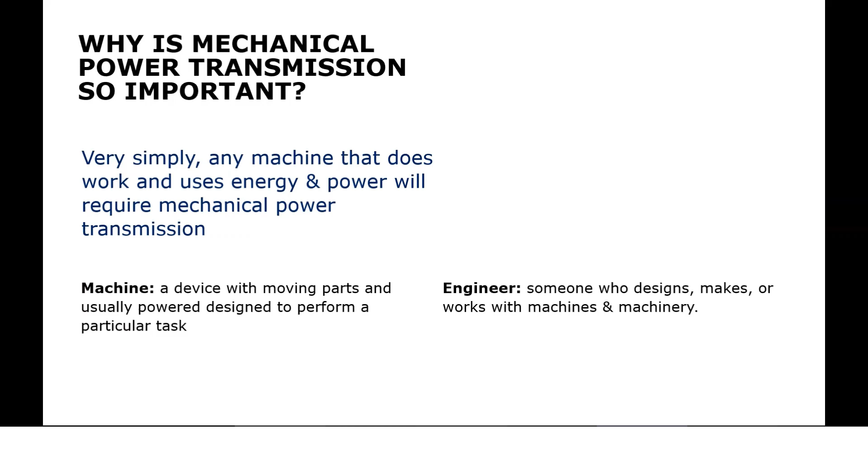So first of all, why is mechanical power transmission so important? These are just definitions - sorry, I'm jumping about a bit because I seem to be losing control now and again. Very simply, any machine that does work and uses energy and power will require mechanical power transmission. So every machine you will ever use will have some sort of mechanical power transmission. And an engineer is someone who designs, makes or works with machines or machinery. So that's really good news, because it says if you're an engineer, as long as man wants to use their machines, people are going to have a need for you. So we're going to explore that a bit.

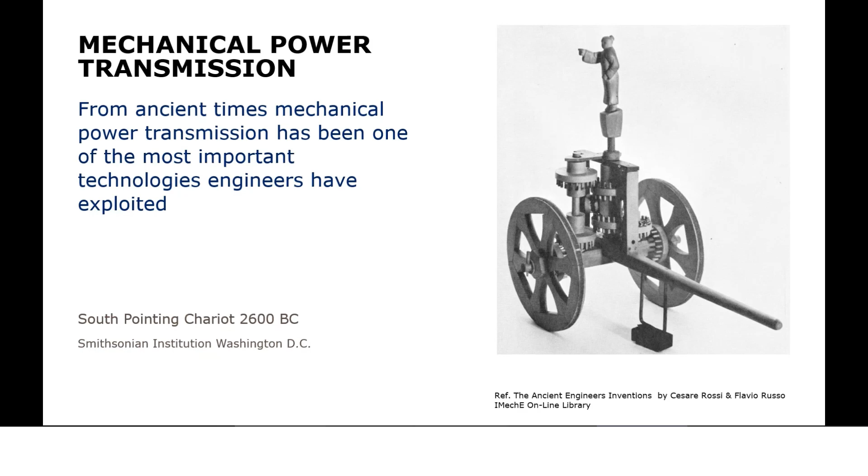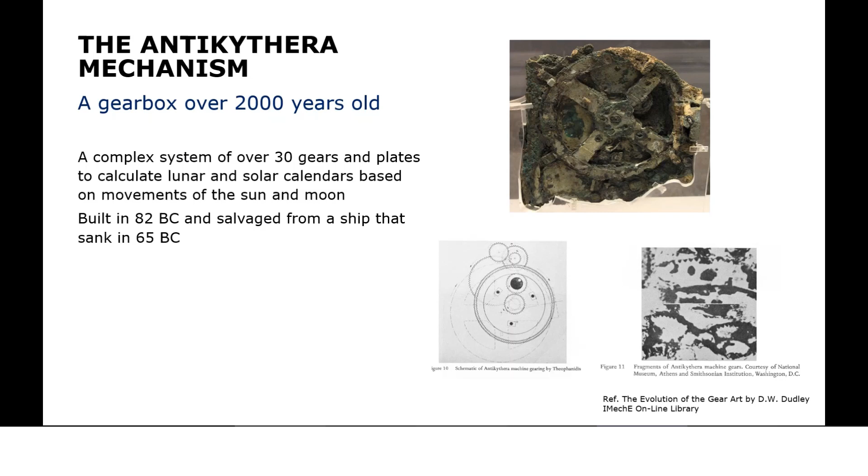If we move forward a little, this is only 2,000 years old, but this is a device to track the planets going around the solar system. So we could use it for navigation, and so we could look at the stars. And this is 2,000 years ago - people were using gears. And that's the point: all these machines and devices have been using gears and mechanical power transmission.

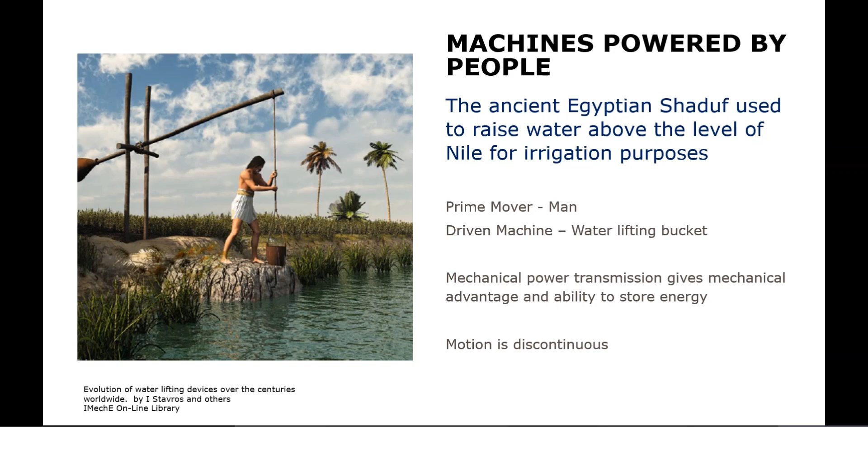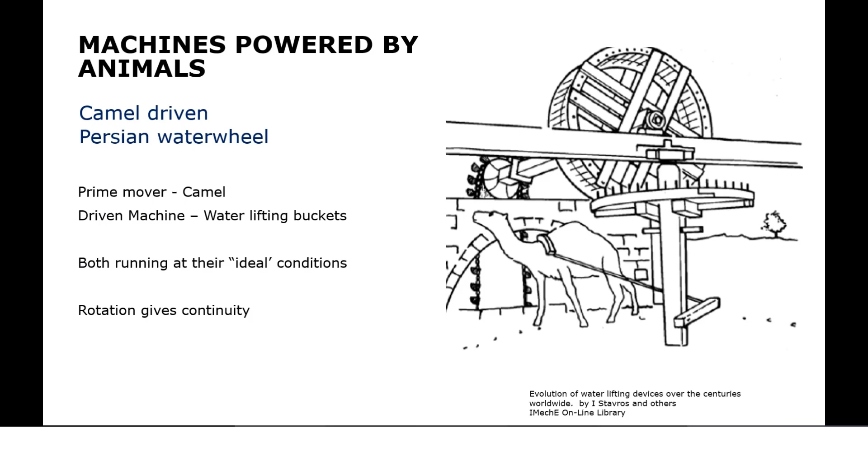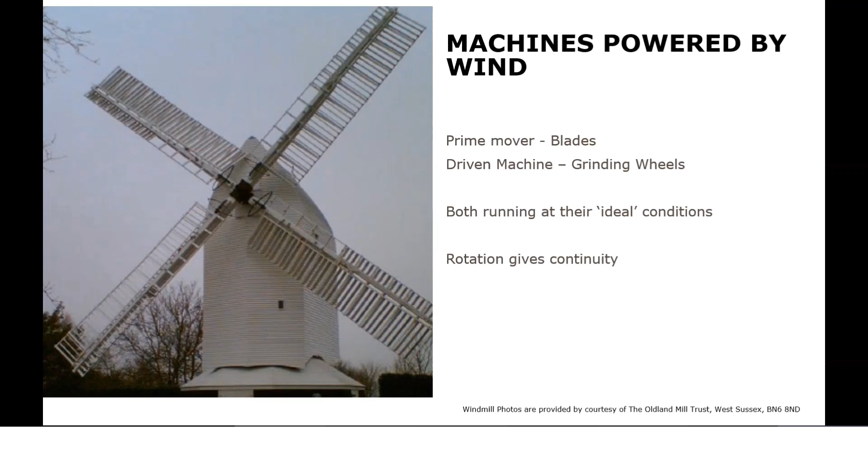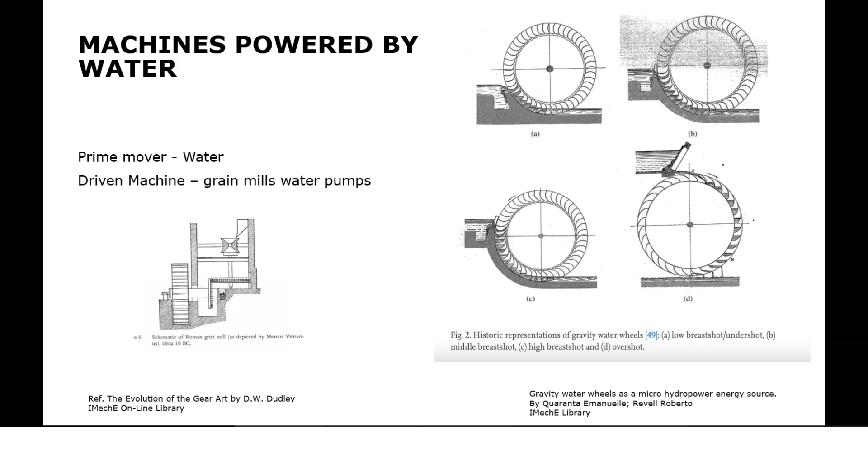But as we go through history, man really wasn't that satisfied, so he wanted to find engines which he could control. He didn't have to wait for the wind to blow, didn't have to wait for the water to run - he wanted a machine he could power himself. This is a very, very early engine. An engine is just a machine used to convert some sort of energy into mechanical energy, which can be used to perform useful work.

In this case, this is Hero's engine. It was never practically used to drive machines. But if you look at this diagram, what we've got at the top is a big sphere fed by two pipes, LMC and GFD, which are connected to a chamber of water. Beneath that chamber of water we light a fire, and all that fire is doing is converting that water to steam.

The steam goes up those pipes into that sphere, and you can see the two outlet nozzles allow that to spin around. So, if you like, it's a very early steam turbine. That was developed 200 years BC, over 2,000 years ago.

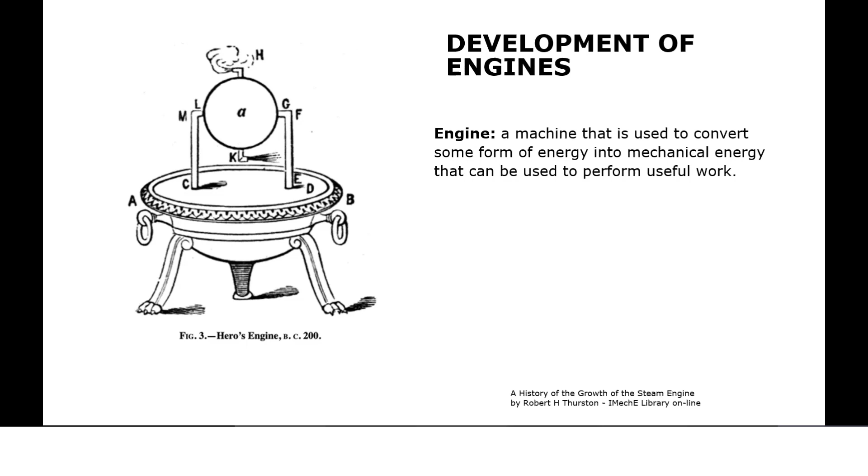Somebody's saying, well, I'm not going to rely on the wind and the rain. I'm going to be in control, and I'm going to use some sort of natural resources, whether it's wood to light the fire or whatever it is. I'm going to start harnessing energy and be in control. Now, that wasn't practical, and so we had to wait quite a while. Then we got the first practical industrial engine, and that actually required a new word.

So what I've got here is one of James Watt's steam engines, and you can see there we are using steam. I'm not going to go into the details of it, but what we have there is pistons. As you create the steam, you put it into a piston, it goes to and fro as it expands, and you get those pulleys to go up and down and start doing useful work. Those early ones were used for mines, where people were mining underground to get coal and tin, to go up and down to drain the mines from water so we could dig deeper to get the raw materials we wanted to use.

It's interesting. Until that time, we didn't have the word horsepower, but James Watt invented the word horsepower, and he needed it to prove, well, I've got the steam engine, I want to show people how powerful it is. So he invented the term horsepower to say, look, this is a 50 horsepower steam engine. It's got the power of 50 horses.

And there's a certain irony in that, because we sort of stopped using the word horsepower now. We use watt. It's certainly ironic that the man who invented the word horsepower, his word isn't used anymore. So we've started using a new word, watts and kilowatts, named after him.

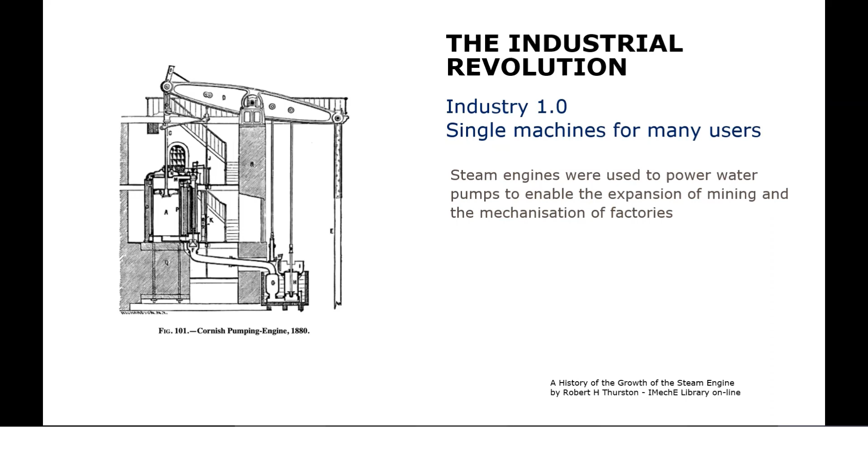We also had the mechanization of factories. So this is a cotton manufacturer in Great Britain. In this one, it may be difficult to see, but it's an old sketch of it. We'd have one big steam engine driving shafts going around. And you look at the ceiling above there, you have these shafts going along, and you can see pulleys and belts. Each of those pulleys and belts were connected to those spinning and weaving machines in this cotton factory. This was long before the days of health and safety legislation, and you had these belts spinning around, connecting all these machines.

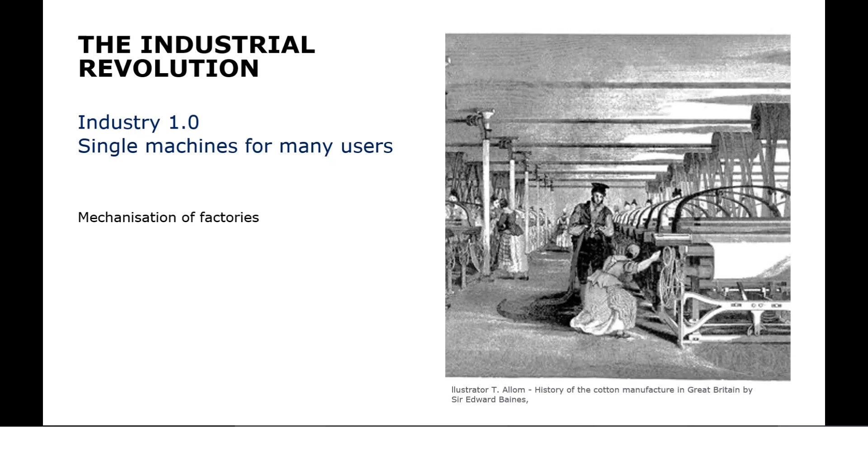So we could start having factories, mechanization of factories, producing cotton wool and all these other things. So one big machine with many users.

In addition to that, yes, we had factories, we had coal mines, we had mines producing all this output, and you had these cotton factories producing cloth and wool, whatever it was. So you had all these products and you had to do something with it, you had to distribute it. So we developed steam engines and transport systems in order to get the coal we'd mined, the cloth we'd manufactured, get it out to ports, get it out to ships and sell it all around the country. And this was happening all over the world. Once we'd started getting these machines, that happened.

Each of these machines has got mechanical power transmission in there, whether it's belts, pulleys, or even gears, it's used all the time. So that's Industry 1, the first industrial revolution.

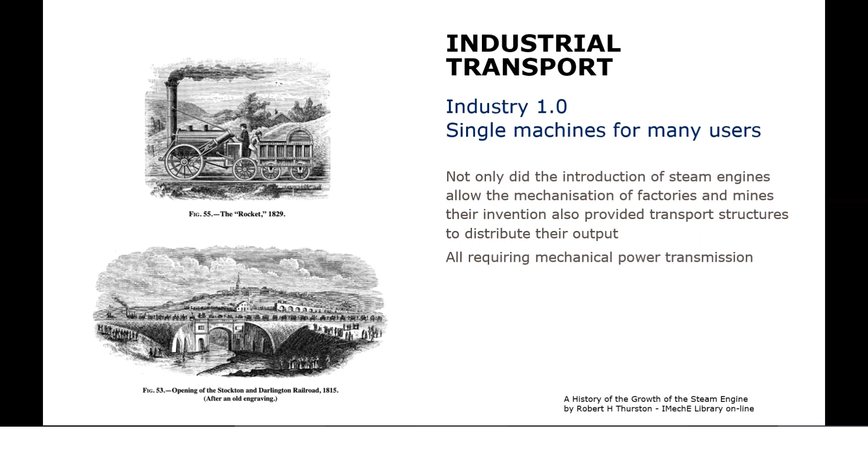But development was going on all the time. In addition to the big steam engines, you could also have small steam engines. If we look at this diagram, you can see we've got a very early electric motor, a picture of an internal combustion engine, and at the bottom right, a picture of the first steam turbine that was practically used.

Remember Hero's engine from 2000 years ago? Well, that was in the first ship to have a steam turbine, and that went at a speed nobody could believe. But what I want you to think about is that these prime movers were getting smaller and smaller, so you could have many machines for many users. You weren't relying on one big machine with lots of users, like at the coal mines or in the cotton factories.

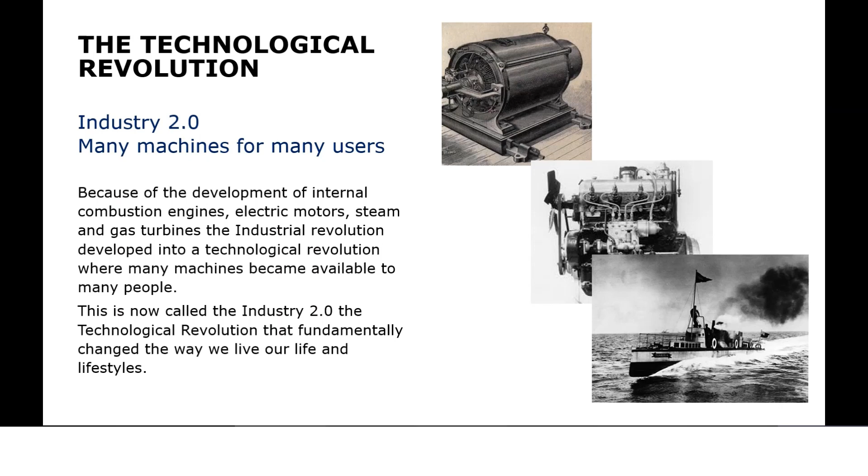And this pretty much heralded Industry 2, mass production. We take these things for granted. I just want to show you a picture of Henry Ford and the Model T car, from 1908.

Now, I know Henry Ford didn't invent the first practical car, and he didn't invent the first internal combustion engine, but he did two incredibly important things. He invented mass production. He said, I've got this car and I'm going to start mass producing them. And the mass production of cars did two things.

First of all, it reduced the cost of these cars, so they were more affordable. You weren't just making one, you were making hundreds at a time. It reduced the cost of production and made products more affordable.

The other thing, which isn't usually recognized, is that all of the workers in the factory got a step change in their wages. They got more money, and that meant they were in a better position to buy these products.

And it wasn't just cars. Remember the cotton factory. Once we started having mass production, the cost of products got cheaper, and the people employed there still didn't get massive wages, but they got regular wages, wages which meant they could afford them. This is the thing we take for granted.

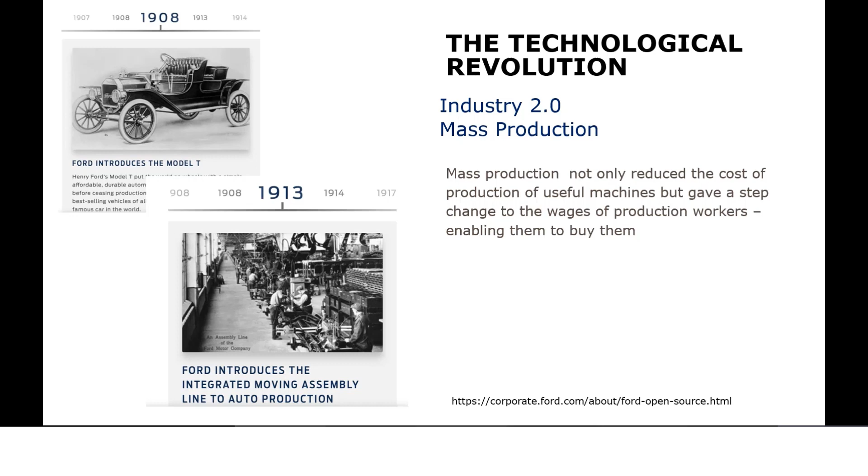So let's go through this again. What I said is that in all of these cases, mechanical power transmission allows the prime mover and the driven machine to run at their ideal conditions, whether it's a camel going round in circles or water buckets going up and down, or whether it's an internal combustion engine driving wheels - it lets them run at the right conditions.

Now I'm going to bring you an equation, the key to power transmission. I'm sure you're all engineers and know this already, but power equals torque times speed. And look, that name's come up again. So, a coherent set of units: watts equals Newton meters times radians per second. Power equals torque times speed.

That equation says that for a certain amount of power, whether it's coming from a camel, a man, or an internal combustion engine, if you reduce the speed, you increase the torque. You know that if you've ridden a bike or driven a car and changed gear - if you need more torque, if you have to go up a steep hill, you have to change gear, whether riding a bike or in a car, so you can have more torque, but you have to go slower.

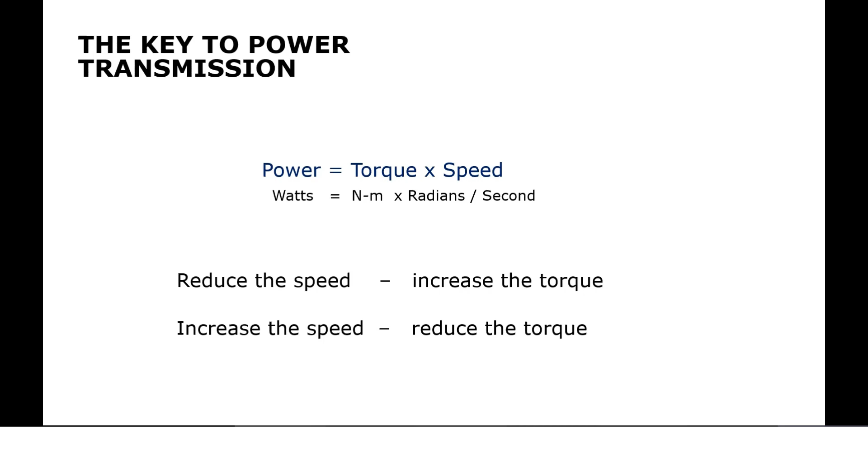And that's another thing we can do with mechanical power transmission: let me change the speed. Yeah, there are certain things that come with that. If you make things go too fast, you've got to think about centrifugal forces, bearings, and all those things. But basically, the faster it goes, the lighter, smaller, and cheaper you can make it. And you appreciate that, you can make things a lot more interesting. So it's doing all of these things.

But why gears? Well, let's have a look at this. And this is, again, for those of you who are members of the BGA, taken from one of our teaching packs. What I'm doing here is comparing different sorts of mechanical power transmission. I'm talking spur and helical gears, bevel gears, worm gears, but also remember belts, V-belts, tooth belts, roller chains, Morse chains, and friction drives.

All of those mechanical power transmission methods can do these things. Yes, they can change the speed. But let's have a look down the column. First of all, those are the normal ratios we can get from these devices, and the ratio is how much you can reduce or increase the speed. Then the next column down is the maximum power per mesh, in kilowatts.

So for spur and helical gears, we can actually transmit 30,000 kilowatts per mesh. That's 30 megawatts, massive amounts of power you can get through gears. Bevel gears can transmit almost 5,000. Worm gears we can run at speeds up to 10,000.

But just go down the column. Yes, belts can transmit a lot of power, but it reduces as you go down. Nothing really can compare with spur and helical gears for maximum power. And for maximum speed, 100,000 revolutions per minute for spur and helical gears. Bevel gears can go pretty quick as well.

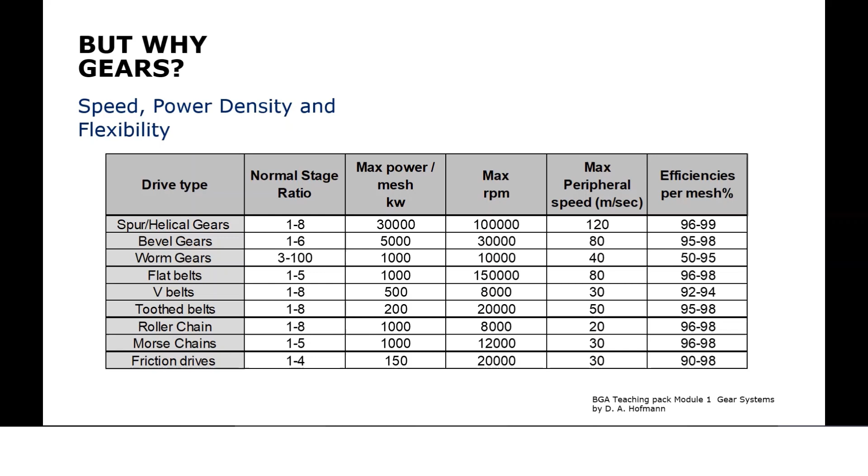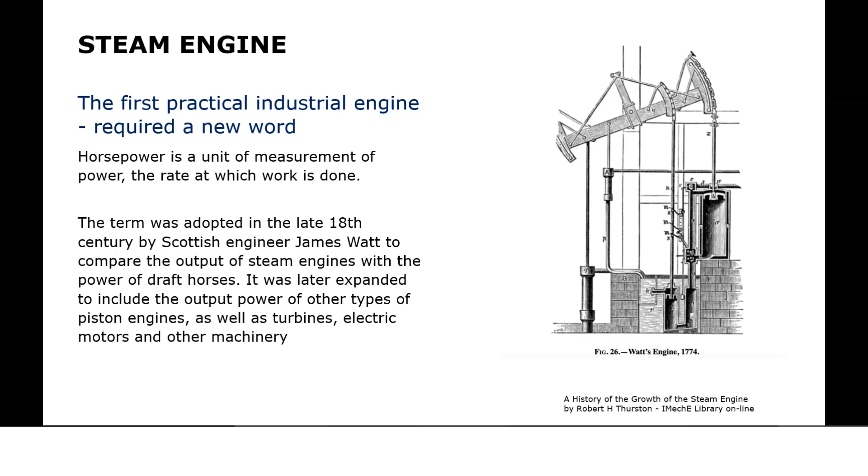So mechanical power transmission helps you, or lets you, run your prime mover and driven machine at their ideal conditions and ideal speed, and also make them lighter and cheaper. But if you use gears, you can put the prime movers and driven machines exactly where you want them. They don't have to be parallel - you can put them at 90 degrees or any other angle you want. That's why gears tend to be becoming so useful and important.

And remember, we've got all these devices with small prime movers, electric motors, internal combustion engines, and we can use this mechanical power transmission to develop lots of interesting machines. And I just want to explore that a bit. Let's just go back a bit.

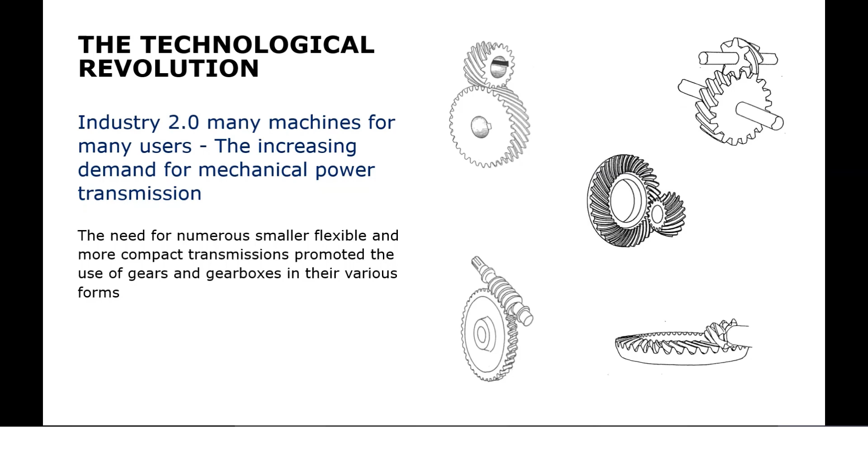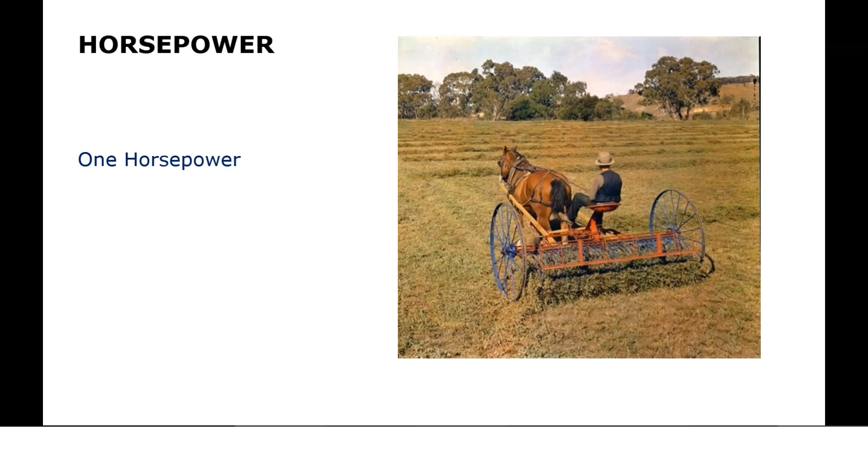Let's have a look at horsepower. Remember, James Watt invented horsepower, so he could show how powerful his steam engines were. Looking at this machine, which is just a farmer with a horse going around turning over grass to make into hay, that is clearly a 1 horsepower machine. Now, if you have a big farm, say in the USA, going back a little while, you may need a bigger machine.

So let's have a look at a 30 horsepower machine. I was quite staggered when I saw this. I actually didn't believe it, but this was the truth of it: a combine harvester going back, where you have about 30 horses. Now, I'm not convinced all those 30 horses are pulling their own weight, but if you want to harvest all of that wheat that's there, you need that sort of power to do it. Imagine you're a farmer - you've got to feed all those horses, make them all pull their own weight, put shoes on them.

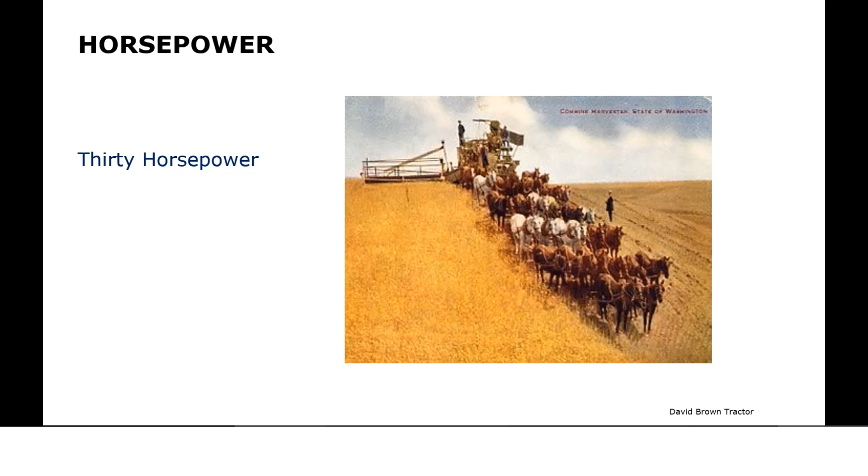It's quite awkward. But let's think what happens when you've got an internal combustion engine and a machine. There you have a 30 horsepower tractor. Because I used to work at David Brown, that's a David Brown tractor. It's quite an old David Brown tractor, but it's 30 horses. The truth is, that can do all of the work of those 30 horses. All I've got there is an internal combustion engine - within that quite old tractor, there's a 30 horsepower internal combustion engine.

What we have is a multi-ratio gearbox to allow the engine and the wheels to run at the right speeds if the man wants to go faster or slower, so we can change gear, change speed. In addition, he's got a bevel gear to put the axis of power through 90 degrees to drive those 2 big wheels at the back. He's also got a differential gearbox to allow the tractor to go around corners, letting the wheels go at different speeds and have the right amount of torque. Also, very cleverly, you can put in power takeoffs to drive lots of other machines. Just think about that massive step - internal combustion engine, gears and mechanical power transmission gives you the ability to do all of that work with one man on a tractor.

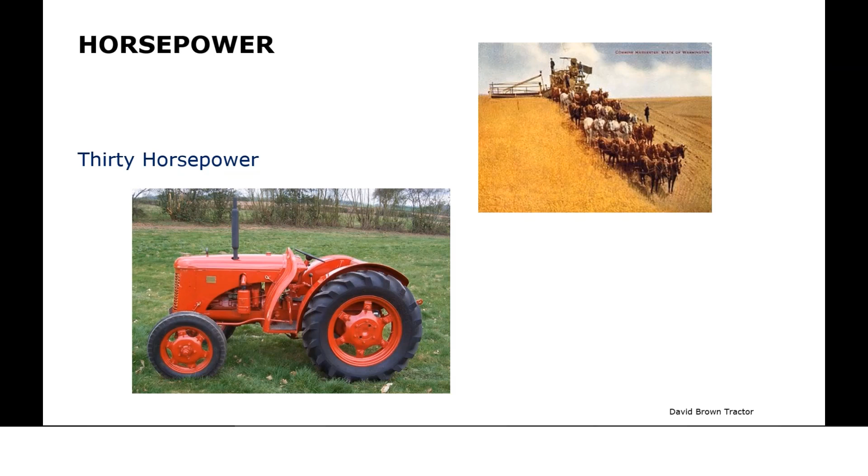Now, I'm not going to get involved in global warming and all those other things, but I'll give you a thought before I move on. At the beginning of the 20th century, the whole world had about 1 billion people, and at the end of the 20th century it had about 5 billion people. We were farming less land, or certainly no more, because 5 billion people take up a lot of land. So in order to feed all those people, you demanded to have large tractors and machines. Even though the tractors are probably a more efficient use of energy than the horses, because there's less wastage, you've still got to feed people. So that's a thought - we're not going to go there today, but it's just showing you how engineers are required to do it, and how we take for granted all those things happening at the moment, all those machines we have.

Everybody listening to this probably has access to their own modes of transport, whether it's a motorbike, a car, or a bus. We take it for granted, all those things that they get. I just want to go a little bit further into that, so let's look at personal transport.

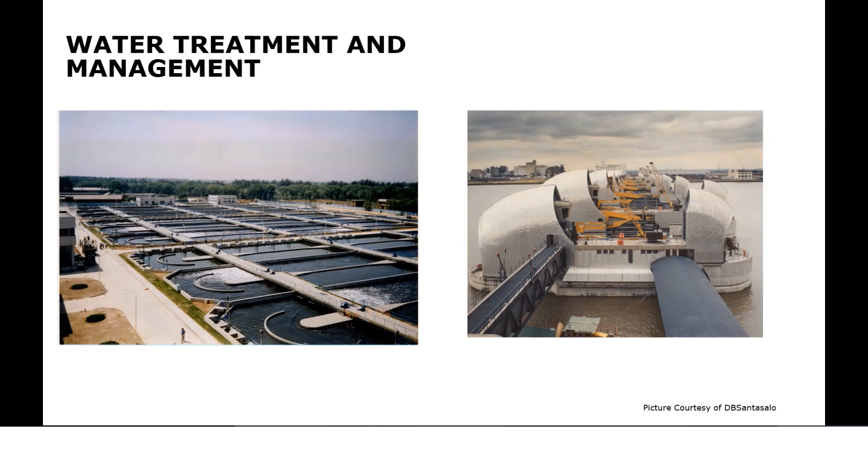Water treatment and management - that's a Thames barrier, if you want to make sure things don't flood, or you want to treat water, sewage management, you've got gears and gearboxes doing it. If you're making steel, if you've got steel mills - everywhere you go, machines do it.

So if we're going renewable energy - yes wind - over 90% of wind turbines have gearboxes in there. You can actually have wind turbines where you get the alternator to run at exactly the same speed as the rotors. These tend to be very heavy tower top masses, but I think it's no more than 10% of wind turbines don't have a gearbox.

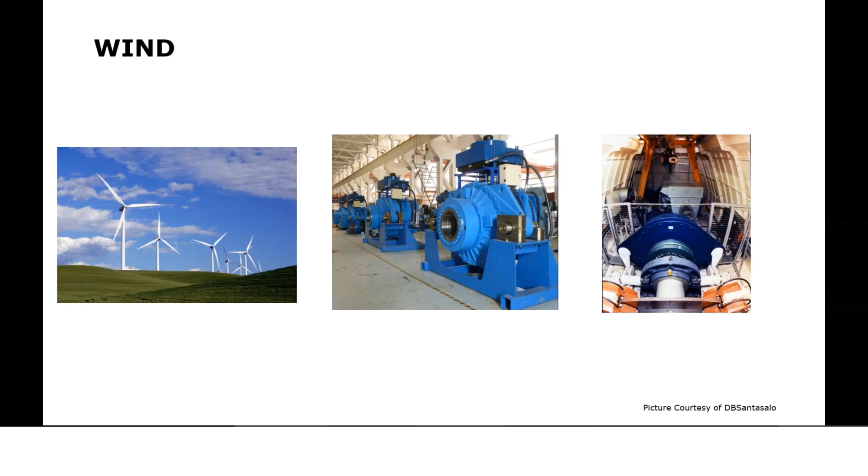Now in that application, each of those 6,000 mirrors had two sets of gears in there to tilt the mirror and rotate it to follow the sun. Not sure how much CO2 you used in making all those gears and gearboxes and how much you're going to save, but they're there to do it.

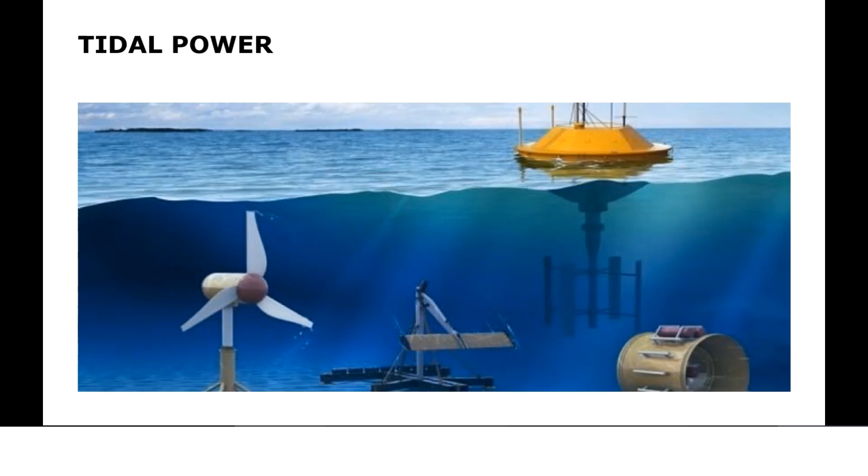So now then, I've come to these things. What I've shown you there is throughout history, we've used mechanical power transmission, gears and gearboxes, and very briefly shown you why that is the case.

But there's a terrible, inescapable truth, and it's quite sad for somebody like me to say, I spent my whole life being involved in gears, and the sad truth is nobody actually wants gears. They don't want them, they only have them because they need them. They need the gears and gearboxes and mechanical power transmission to allow the prime movers and driven machines to run at the ideal conditions. If by some magic prime movers could run at any speed or position, whatever you wanted, we wouldn't need gears, but at the moment we do.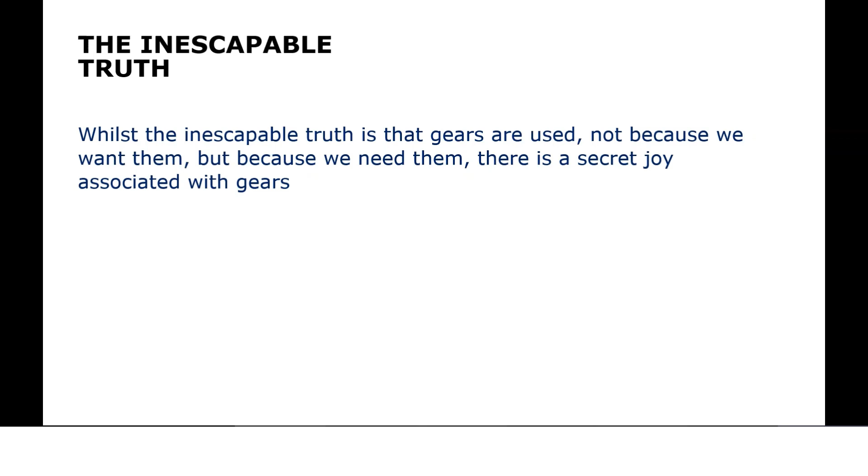But there is another secret joy. Everybody needs it, and you can make machines that much better. And this is the revelation, which I will read out exactly as it says: to fully understand and appreciate gears, one of the simplest, oldest, and perhaps most elegant and precise of all mechanical components, it is necessary to grasp a vast range of engineering topics. And that is the joy of gears. They embrace so many technologies that there's always an opportunity to learn something new. And it's inevitable that once involved with gears, you will meet and enjoy working with many different and helpful engineering experts. And that is the joy. If you're going to get involved in gears, you've got to start learning a lot of engineering things.

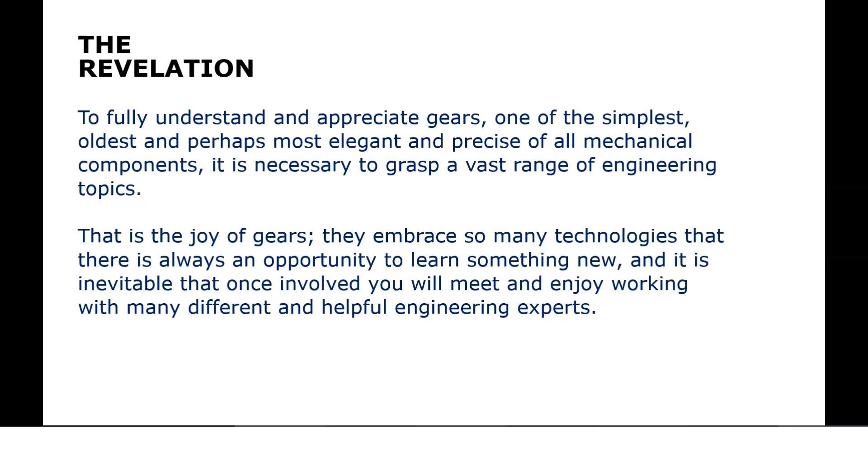So now I'm going to spend a little time just going through these things. First of all, we need to understand the machines we use. We need to understand the power-speed relationships. Two diagrams there, the one on the right is a fan curve. You look at that fan curve, the torque required by a fan goes up with the square of speed. So if you double the speed of a fan, you need 4 times as much torque.

And on the left there is a vehicle. If you're going to drive a vehicle, you need to understand how much power it wants. And there's two components there. First of all, there's a rolling resistance, which is the green line, and secondly, there's the aerodynamic drag, which is the blue line. You put them both together and you get the red line. You need to understand what that driven machine wants.

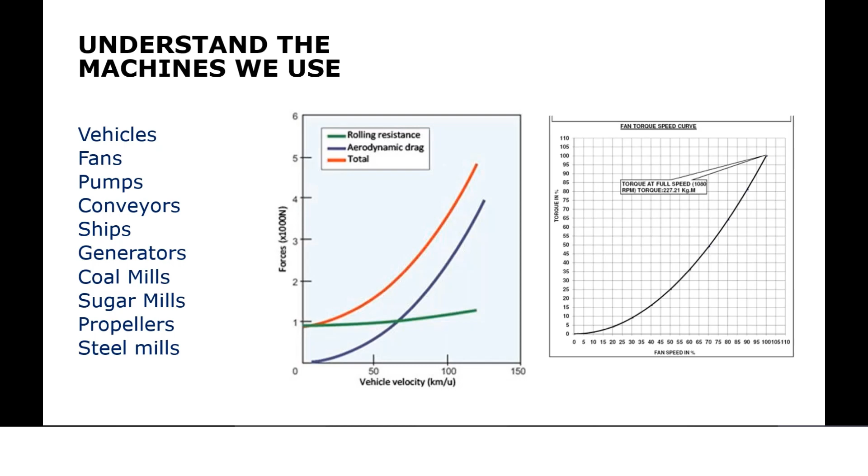Equally, you need to know the prime mover, how much power is coming from that. So just have a look at these graphs here. What I'm plotting there is, again, torque against speed. Top left is an internal combustion engine, top right is an electric motor, bottom right is a gas turbine.

So just have a look at that internal combustion engine, the top left one. You can see the torque, and you know this if you drive a car and change gear, the torque peaks and it tails away. So when you're driving an internal combustion engine car, either you or the automatic transmission will be continuously changing gears up and down, so you're always at the peak of that torque or getting the right efficiency.

Just go over to the right, where you can see the torque speed characteristics of an electric motor. There's two curves on there, the bottom is torque and the top one is the current required. Look at the one at the bottom of those curves on the top right diagram, you can see at 0 speed you get an awful lot of torque, and as you go up to speed, you get to synchronous speed, you don't get any torque.

Now, for years I've understood the mathematics of that, but until you actually sit and drive a car with an electric motor and electric drive, you're amazed how much torque you get at 0 speed. You put your foot on the accelerator, where else did that torque go? I don't have to change gear to move it. And it's quite staggering, but you do need to understand these things.

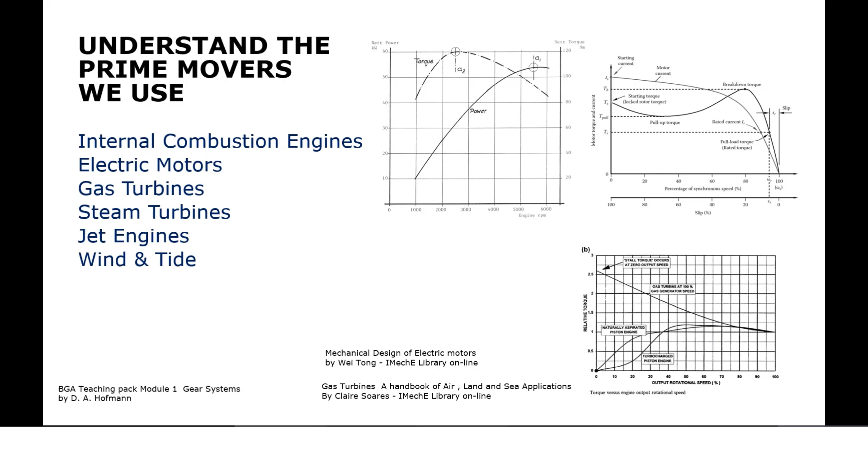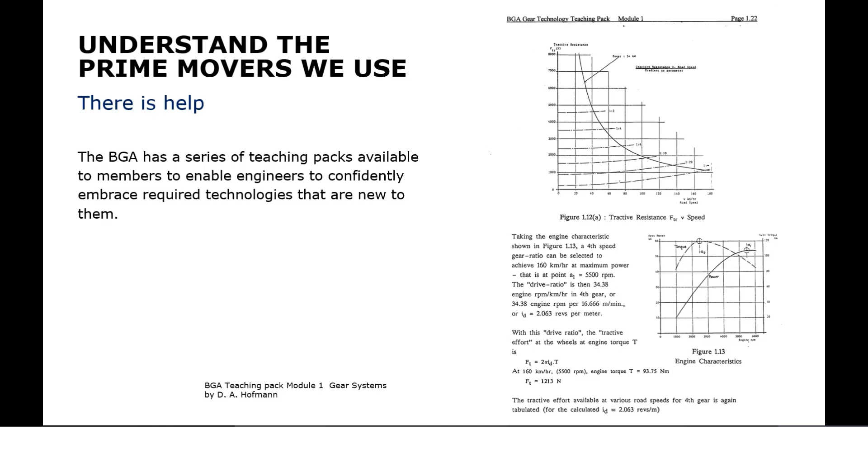So somebody has to put system designs together, so you do need to understand the system design. And what I'm going to show you here is a very simple way of looking at it, I'm going to use an electric motor, and that's my diagram at the top left there, where I can see torque against speed.

And I'm going to drive a fan. You go down, you can see that square curve underneath of the fan, and the diagram on the right shows me how I put those two things together. So what I've got there is the available torque from the electric motor, and then I've got the required torque from the fan.

And you can see they only come together at the rated load. At 0 speed, the fan isn't really demanding a lot of torque, but the electric motor is supplying an awful lot. So we have this overload capacity, which is great because it means I've got more power than I need, and very quickly I'll get the system up to speed.

And that's a great thing if you've got a light system with no inertia. It's like switching on a motor with a fan, it suddenly gets up to speed very quickly. But imagine in that system a very large inertia, and all that torque was there trying to get these great big inertias, great big bodies up to speed. You might take minutes getting up to speed, and all that time you've got more available torque than you needed, and you may be overloading the system.

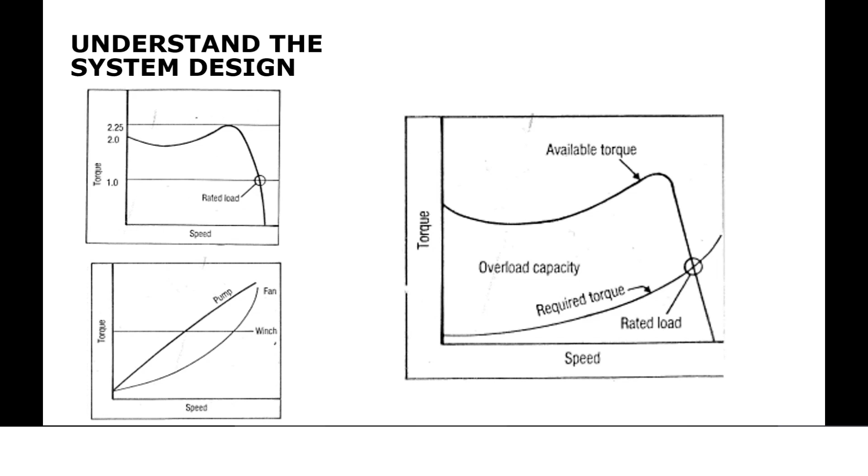So somebody with any system that's put together has to understand all these things and take responsibility. If you did have a system which had large inertias and you didn't want to spend too long getting up to speed, or if you were going to take time getting up to speed, you didn't really want to overload things, you could put a fluid coupling in there, you could put a torque limiting clutch in there, you could start getting a special motor which has a soft start. Those things have to be done, and somebody has to take responsibility. It's just another of the technologies you need to embrace if you're looking at mechanical power transmission systems.

So again, understand the loads in the system. The bottom right picture is actually showing you the load against time. That's, say, at the start of a shift, 100 horsepower, 100 kilowatt machine: you start at 80 kilowatts, you go up to 120, then after lunch you go down to 60, then up to 125. You think you're in control, but anybody who's measured loads, measured torques or powers, knows that even in steady state, look at the steady state picture there, nothing's constant.

And when you go from one stage to another, you get transient loads, things change. Nothing's ever constant. So what you may think is a nice smooth load, in practice may be nothing like that.

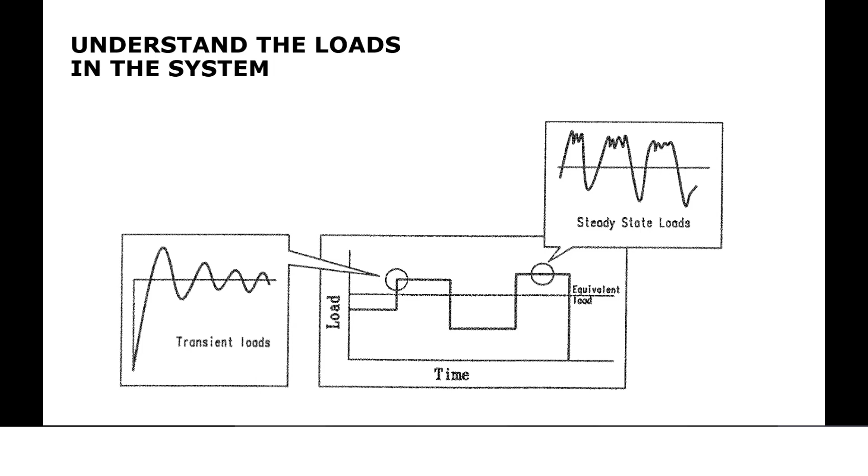And just let me give you an example. This is understanding the loads in the system. This is a bit of a history lesson, going back to when we had the first of the contemporary wind turbines, going back to the 1980s. And I know it's probably a long time before many people here were born, but in the 1980s, we were first starting to get the new generation of wind turbines.

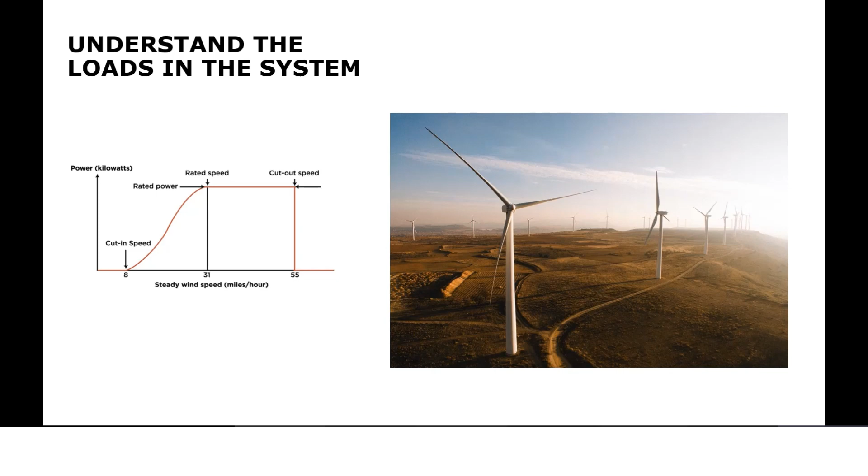Just let me go through this a bit. So when we started having failures, people started deciding they better understand the system. And so what we did—look at the wind turbine. Yes, you've all been to college, you can all write differential equations, we can all do an analysis of the system. So what do we do? Well, look at this diagram.

And then if you're really clever—and this is where my maths capability met its limit—trying to remember Laplace transforms to solve differential equations. But luckily I was working with people who understood these things, and we could start doing all of this to work out the loads in the system.

But the thing you soon found out is the most rigid part of that system is the air gap between the rotor and the national grid. In this case, it was the USA Altamont Pass in California, where it's 60 Hertz. I'll come back to that in a minute. Remember, you've got this series of lumped masses and stiffnesses, and I'm telling you now, the most rigid thing in there is an air gap between the rotor and the national grid.

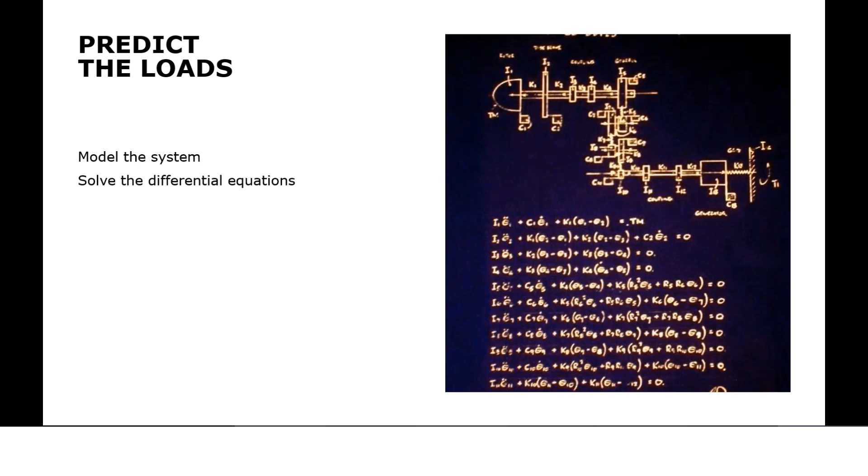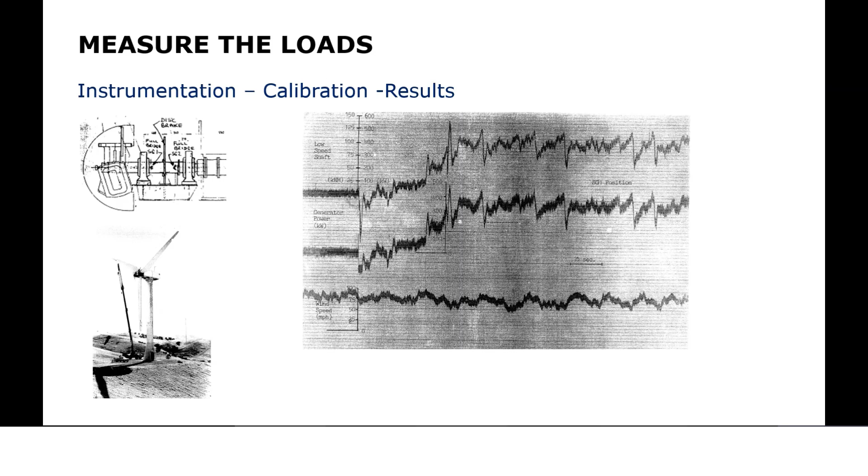And sometimes blades were falling off machines because of the loads that were being transmitted. And we learned from it. The truth is, when you learn from this, we start developing application factors, and those are critical when you're designing gears. Lots of the courses we run at the BGA cover this, where you have to understand for a particular application what sort of overloads you would expect. So we have standards, international ISO standards, national standards will give you advice on application factors, industry standards, the wind turbine industry has its own standards, the petroleum industry has its own standards. You need to dig deep and understand what's going on in the system, because it's unlikely you're ever going to have the time or even the capability to do those differential equations. And clearly you can't measure loads till you've actually built the system. So as engineers, you're going to have to start relying on application factors and lessons from history.

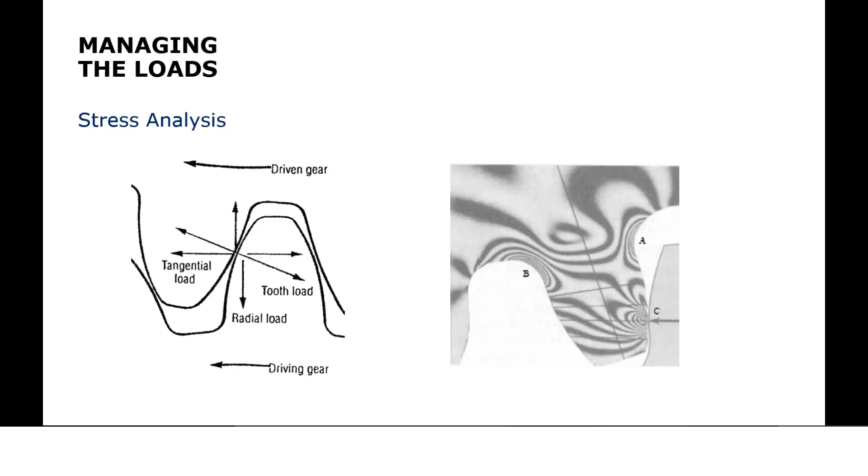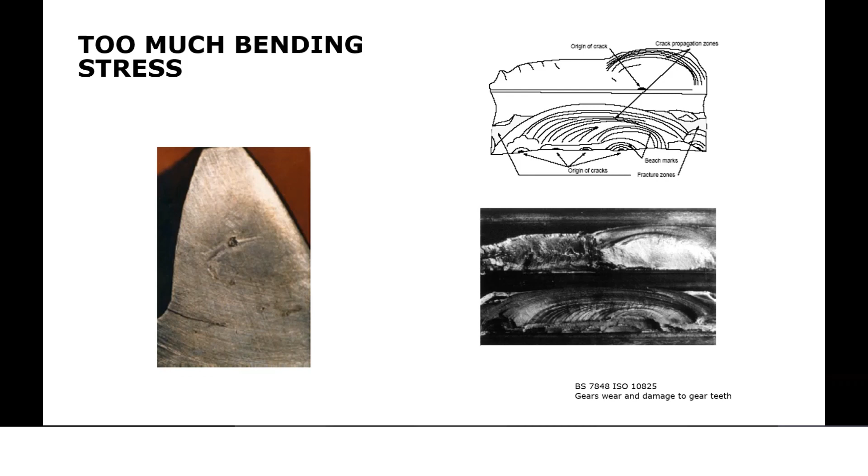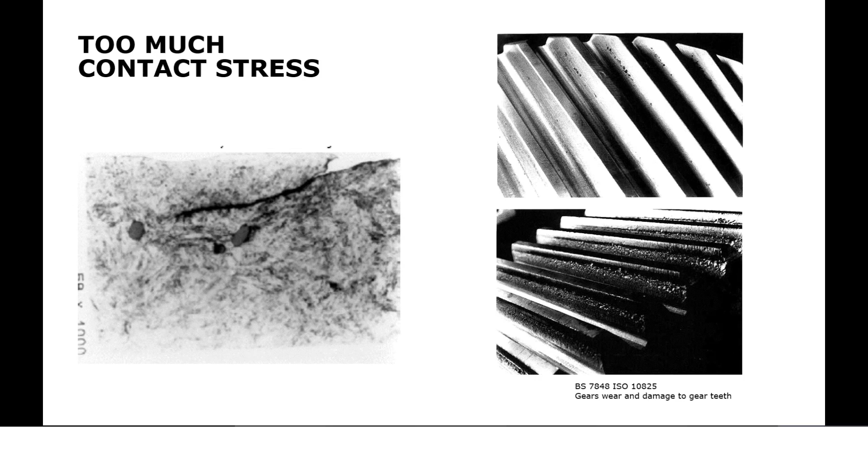So yeah, we can calculate the loads, find them out, but then we have to manage them. We won't go into too much detail here, but if you're going to design gears, everything you learned about stress analysis you need to understand, because those gear teeth are going to start suffering from contact stresses, bending stresses, and you've got to make sure there's no wear failures, because the surfaces will be sliding and rolling together, and you need to make sure there's no damage to the surfaces. Too much bending stress, you start getting cracks. So everything you learned about endurance limits, strength of materials, Goodman diagrams, you will need to understand gear failure. And you need to understand about Hertzian stresses, contact stresses, and all those technologies you need to learn about and embrace.

But it's not that difficult, because there's lots of standards about. In fact, the good news is there's lots of standards which cover all of the engineering topics. Perhaps the bad news is these are not straightforward. There's a lot of involvement in understanding these standards, but the methods are written down and you will have to dig deep into them. Another great advantage of the BGA, the British Gear Association, is all members have access to the top 25 gear standards.

So if you want to look at the top ISO, BSI standards, you can go to them online. Typically, if you had to buy all of those standards, it would cost you £6,500, but you can go online. You can't download them, but you can read them all and follow the equations. You don't have any discretion these days. You have to follow international standards if you want approval for the things you're making and designing.

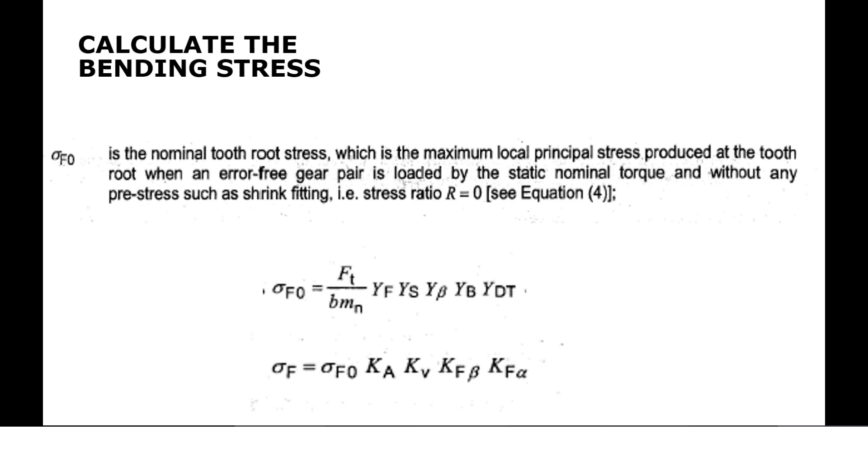And the allowable bending stress, again, we work at endurance limits. And the truth is, it's fatigue. Very quickly with gears and gearboxes, you get up to infinite life. You soon get 1 million cycles of load. So you need to start doing testing of the materials, finding out all about it. And again, one of the many standards goes through in much detail how you sort out the material. So everything you learned about material properties, yes, you're going to have to know that.

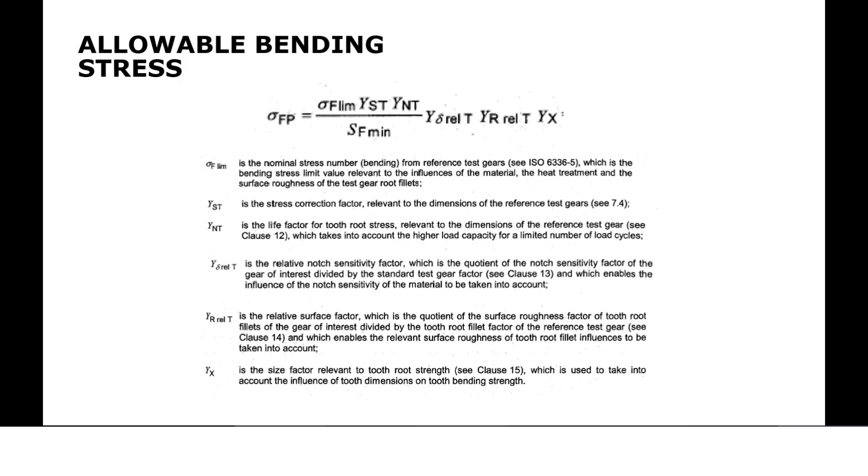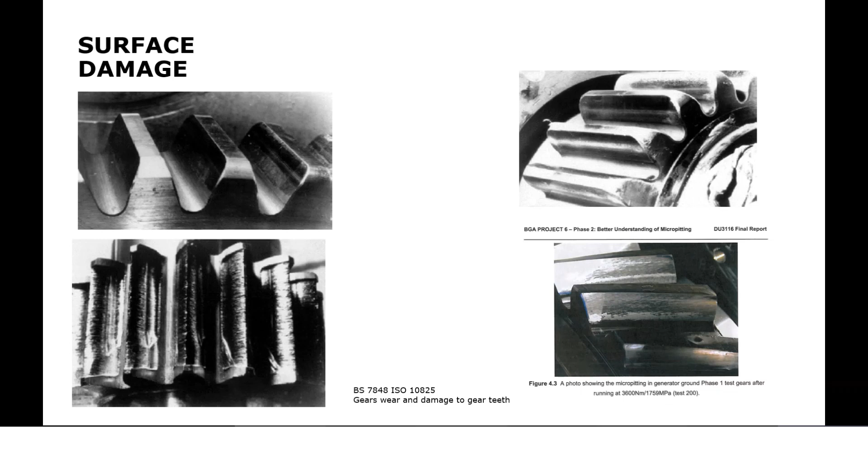Surface damage you have to avoid. I mentioned what happens with gears and gear teeth. They not only roll together, they slide. And we put massive amounts of forces there, and we need to make sure the surfaces are well lubricated. And yes, there's more standards about, and yes, they will help you. You don't just read these in an afternoon. It will take you quite a long time to go through those, understand them, but you must use them.

And you're very lucky today because there's lots of software about which have programmed all these things. But even if you use a program, you need to spend some time understanding it, so you're using the program properly.

To avoid surface damage, you have to separate the surfaces. So you have to start thinking about how we're going to manage that. And all gear teeth transmitting any significant amount of load, we develop a hydrodynamic oil film between them. We have to develop an oil film. And it's great. This is why we use lubricants, because oil is wonderful, it gets stiffer under load. So we work out what the oil film is in there, and we also use elastohydrodynamic.

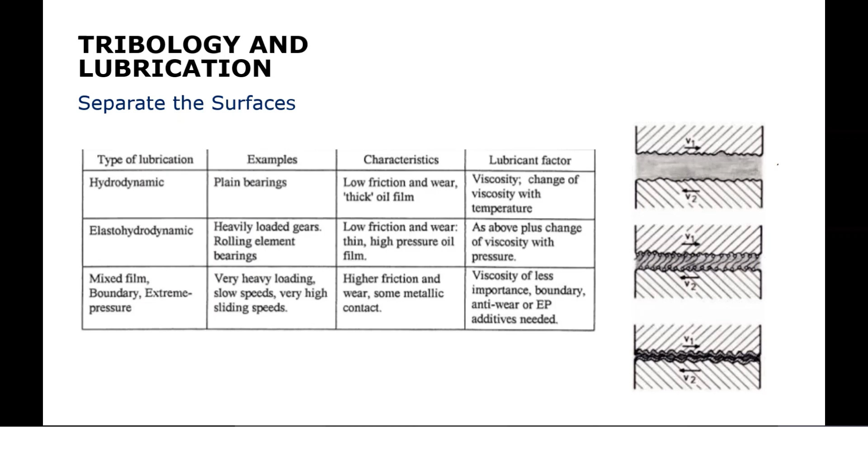And when we call it that, it's because we take into account how much the gear teeth deflect to calculate the oil films. Then, depending how much load you're transmitting, what the temperatures in the mesh are, it will decide what your oil film is. And then you will have to make a decision. Will a straight mineral oil work? Or do I need to put something with anti-wear additives in there? Or extreme pressure additives? And again, the standards and the experts will help you do that, and the oil companies are invaluable in the help they give.

Thermal issues - and again, gears aren't 100% efficient. You have to start looking in there, depending on what oil films you've got. Is it mixed film? Is it hydrodynamic, elastohydrodynamic? The coefficient of friction changes. Calculate the power loss, and then you've got to get rid of the heat. You've got to make sure that gearbox can get rid of the heat, because if it gets too hot, the oil gets too thin, you don't protect the gears. Even if they're 99% efficient, you still have a lot of heat to get rid of, and you have to design and make sure you do that properly.

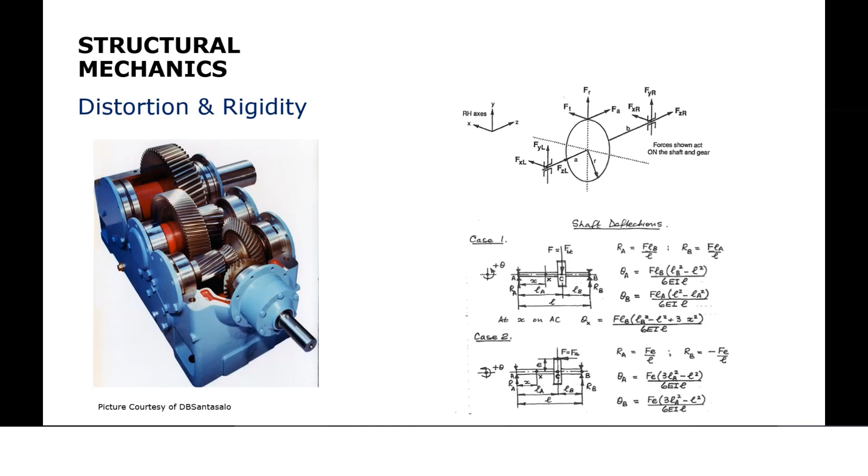Looking inside the gearbox, nothing is rigid inside a gearbox. Remember those bending moment diagrams, those shear force diagrams, looking at bending moments - yes, we need to work those. You will need to work out across the face of those gear teeth how much it's bending, and what those shaft deflections are, because that will change the gear rating. So all of those bending moment diagrams, shear force diagrams, yes, those are critically important when you're designing gears and gearboxes.

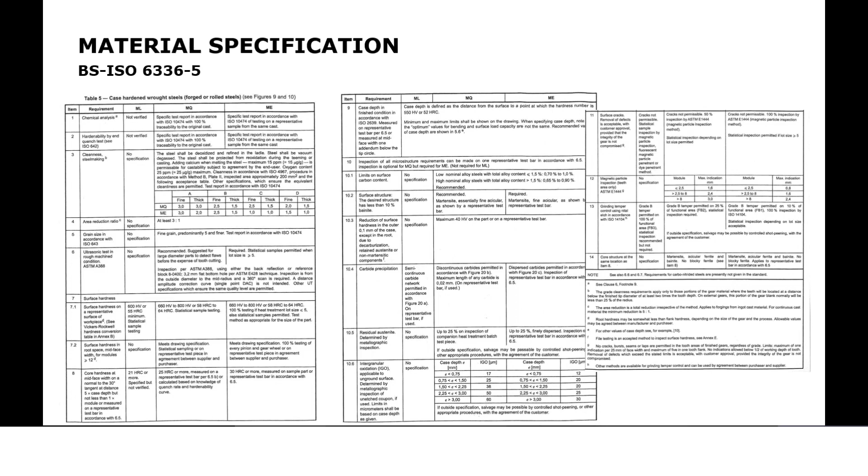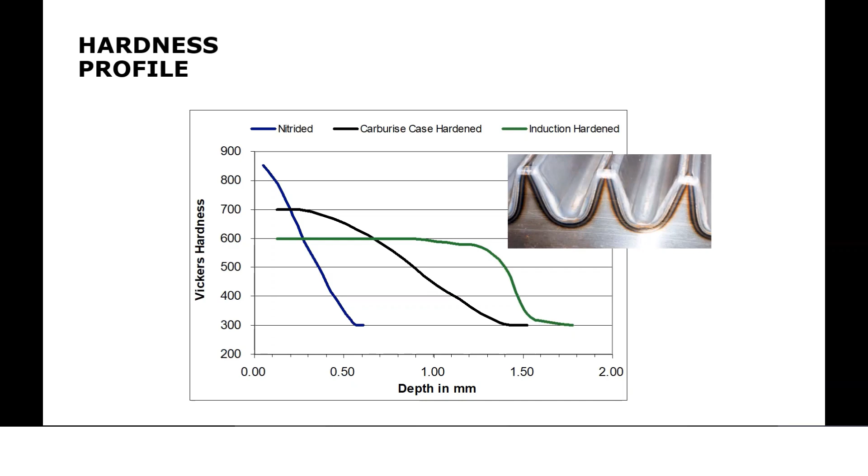Hardness - we will heat treat gears, and those are typically shown in that diagram. If you look at this diagram, it's typically what we look for. To transmit large amounts of power, I need a case hardness. That diagram is showing Vickers hardness, so that's a measure of hardness. The y-axis going up is hardness, and going in is depth. If we nitride gears, we can get very high hardnesses but only a quite shallow case depth. If we carburize and case harden them, we can get pretty hard surfaces but much thicker case depths. And if we induction harden them, we can go to really thick case depths but not so hard. All of those things allow us to do it. Pretty much every gear manufacturer will rely almost entirely on the quality of their heat treatment, or the people who do their heat treatment, because the case hardness you get is critical in determining whether those gears are going to do exactly what you expected.

Material science - this is metallurgy. Yes, you do need to listen in your metallurgy lectures. I know when I was at college, I have to be honest, metallurgy was the most boring thing we ever did. We spent our time looking down microscopes at martensite, sketching pictures of pearlite. But then I went into industry, went to a heat treatment facility, and it was like magic. You could actually see people heating and quenching steel, and you fully understood and appreciated the criticality of the heat treatment process. It's quite staggering, I do mean it - if you ever have the chance, keep safe, but go and see how people heat treat it. It's incredibly, it's more than blacksmithing. Then you will appreciate metallurgy and how important it is.

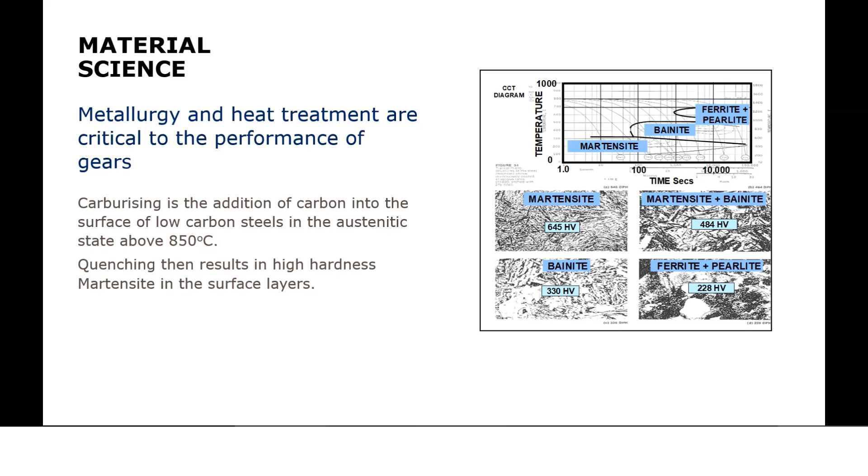Another unavoidable truth: gears and gearboxes, unless properly managed, will be incredibly noisy. You've got to manage that. In some applications you don't want to make your workforce deaf. If it's a defense application, you have to make silent gearboxes so the enemy can't hear you. So you have to manage that.

Managing noise and vibration is a very specialist subject. You have to understand the system response, because with gears and gearboxes we always get a torque reaction. The forces have to go to Earth.

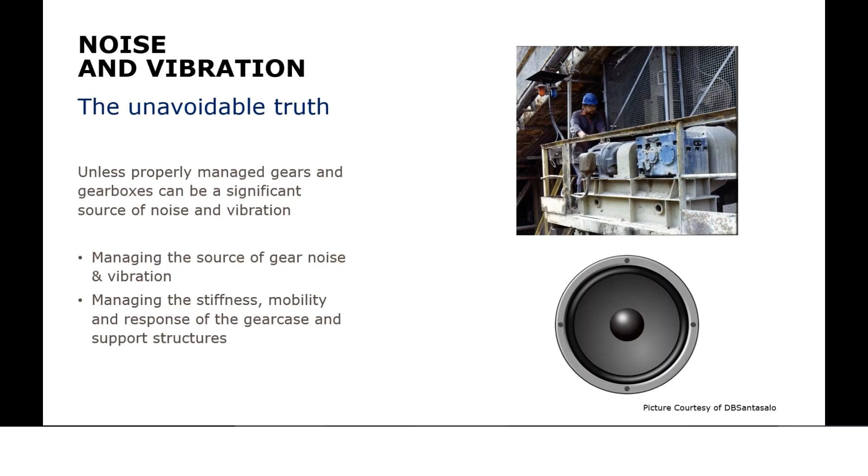So you need to make sure, first of all, you're not making much vibratory force anyway, but also on the way to Earth there's nothing that's going to act like a loudspeaker. That's what this next diagram is showing us.

We look at the system stiffness and the mobility of the stiffness. Now, stiffness is how far things deflect when you put a force on there, but mobility is something different - it's how much it vibrates when you put that force at different frequencies.

That gearbox there, courtesy of David Brown, has pretty much zero mobility at tooth contact frequency - the frequency where the gearbox may produce noise. They've designed that gear case to have zero mobility. It just doesn't respond at those frequencies. They've tuned the gear case to make it quiet. That's a whole specialist subject.

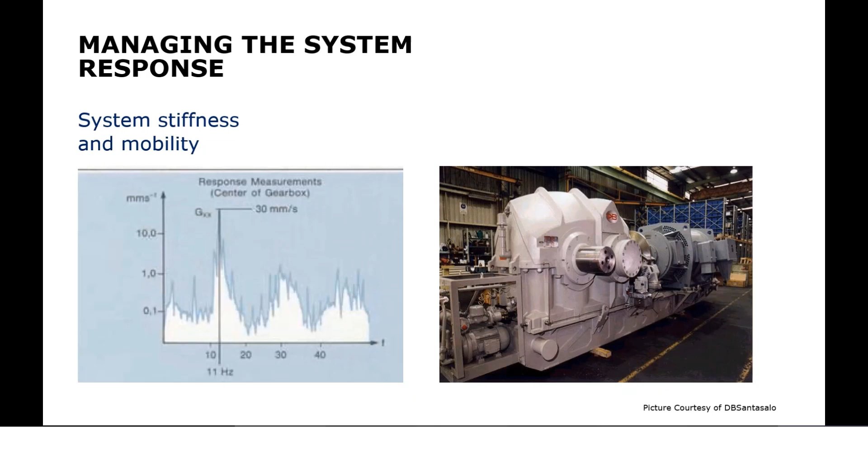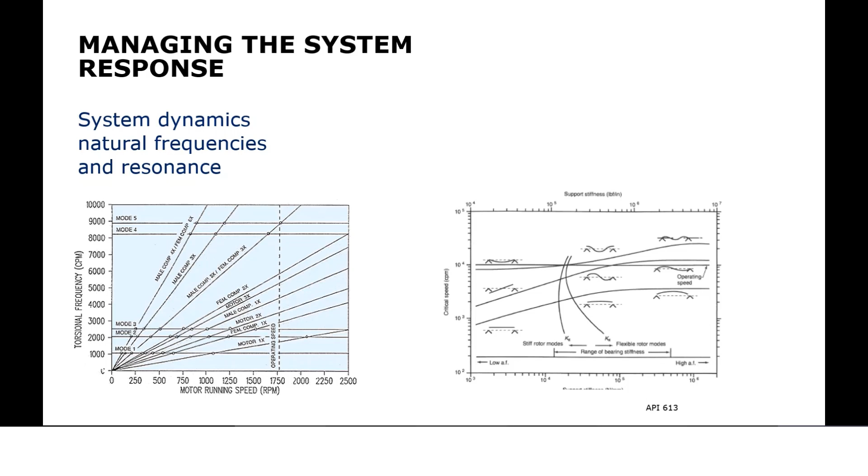Again, within the system you may get torsional vibration, so you've got to make sure you get no resonance. If it's a high-speed gearbox on journal bearings, you may get transverse vibration, so you've got to spend time avoiding transverse vibration or torsional resonances. Again, the whole system you have to understand and learn.

As the gears rotate and transmit force, anytime that tooth stiffness deflects, and it will, that's giving you transmission error. It means you're not getting a constant velocity ratio. Tooth stiffness changes, vibratory forces come there, and you do whatever you can to reduce that transmission error.

Even better news is that some of the software you can buy to rate gears will help calculate transmission error for you. You need to understand that to start playing with tooth design, whatever, to make those gears as silent as you can.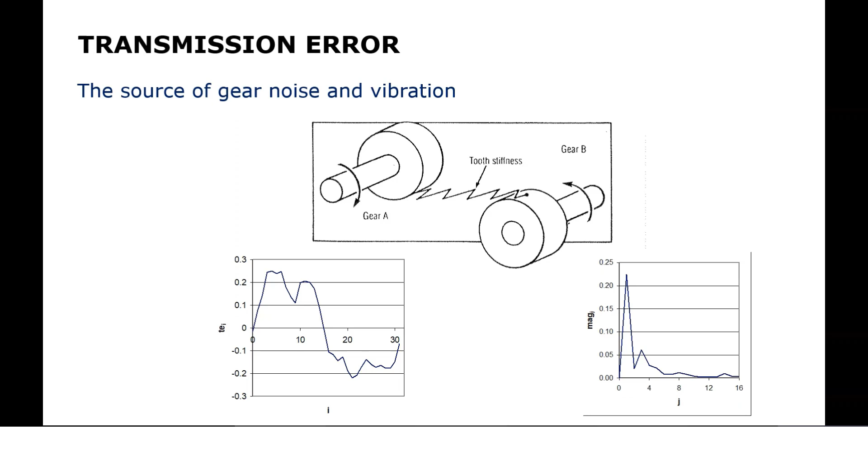Those are the same size as white blood cells. So typically, even the most inaccurate gears that most people are making are demanding tolerances no bigger than white blood cells. People outside the industry do not believe that we have to make gears that accurate.

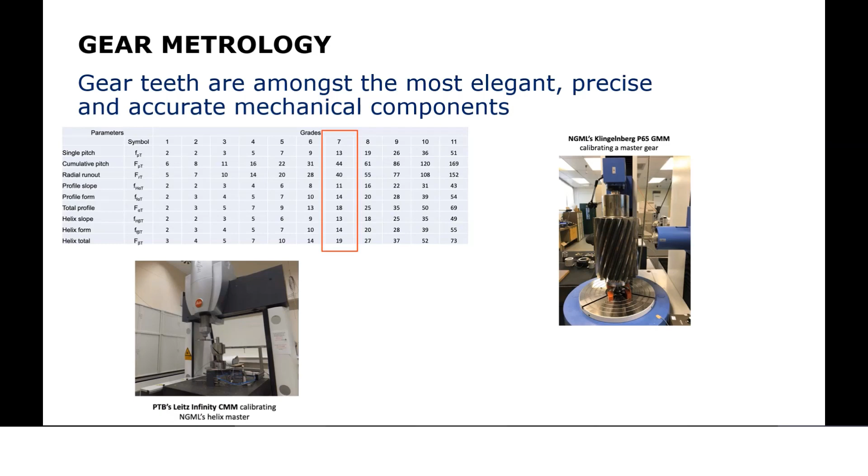Gear measurement is again something else which is a very specialist subject. I'll try not to keep advertising the British Gear Association, but we have a special interest group on gear metrology. If you're a member there, you can join it and help calibrate your measuring machines. We have artifacts we send out so everybody can measure their gear and check how accurate their machines are, and how good the metrologists using them are.

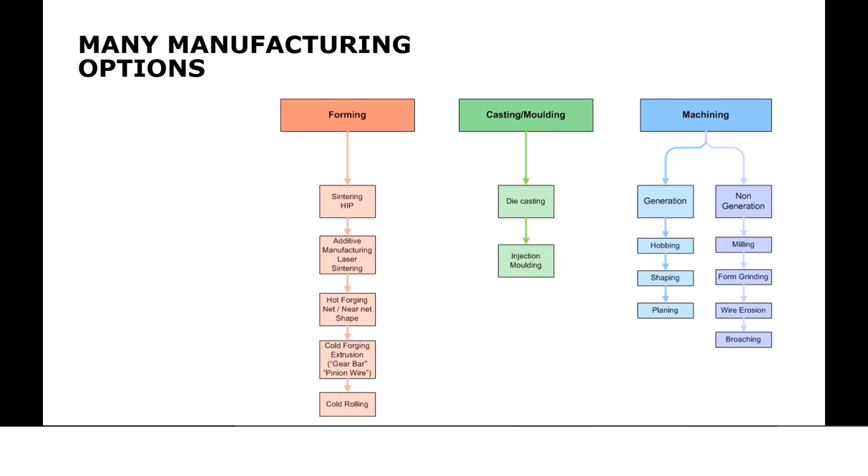I'll quickly finish up, we're getting close towards the end - apologies for going a bit over the hour. I've gone through all the design things and measurement accuracy of manufacturing, but there are so many manufacturing options. You can make gears by forming, by casting and moulding, or by machining. This is the area which is changing perhaps more than anything - it's quite staggering, the new technology we have, and we need to get up to speed with these things.

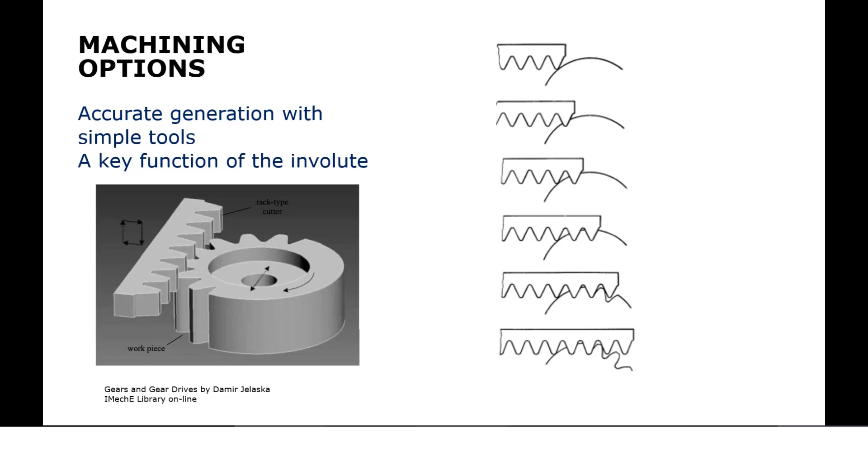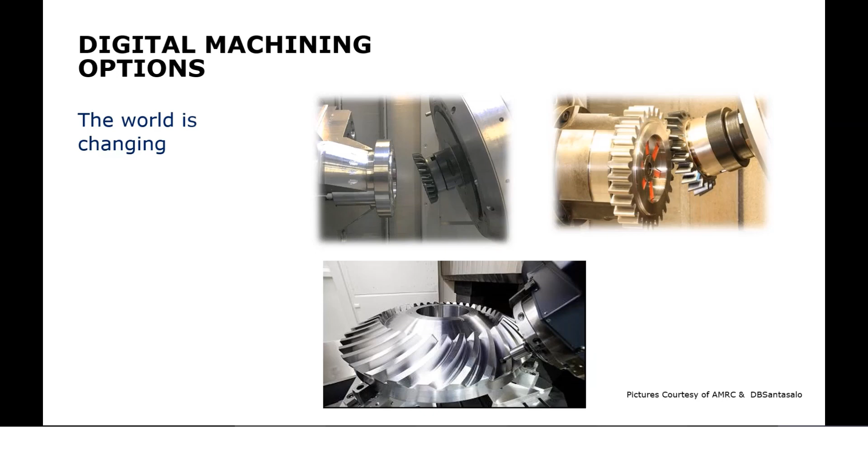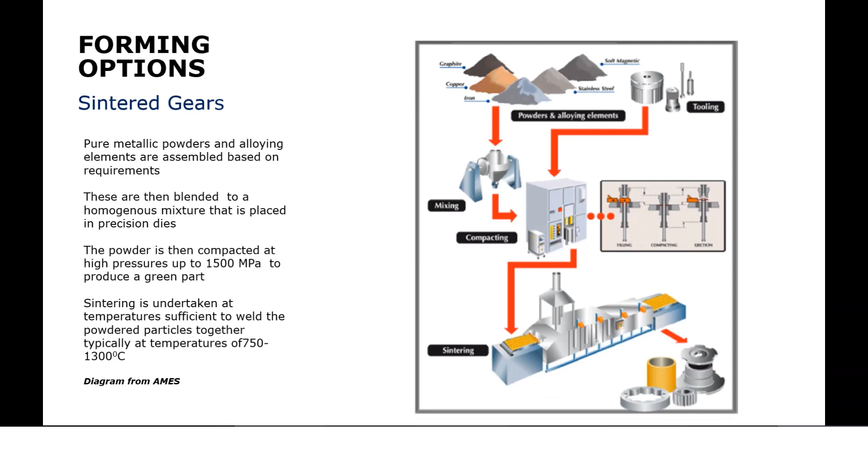Forming options - sintered gears. There are incredible developments going on with sintered gears. You take powders, compress them using a very expensive die, produce a green part, then heat it to very high temperatures to produce a sintered gear with no debris in there. People are taking the opportunity to put damping materials in there and different constructions to make gears silent, to make them quieter. CNC technology is making that get better and better.

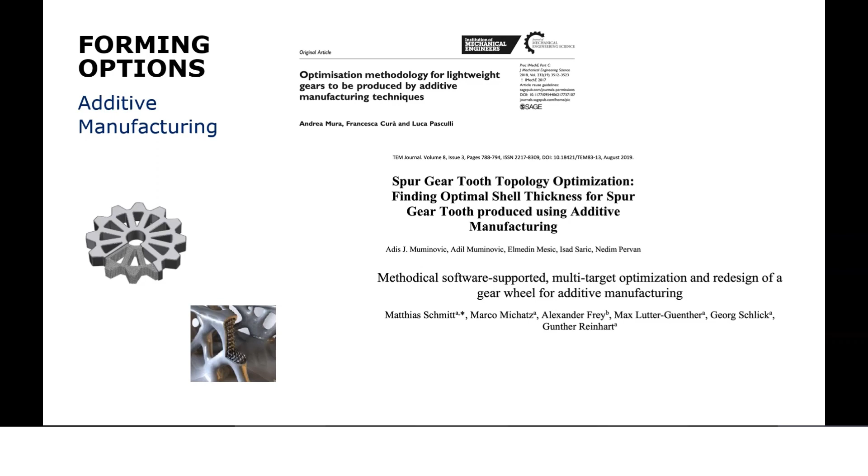So now I'm nearly at the end. We started 4,000 years ago with south-pointing chariots, and now I want to talk about Industry 4 - just the last few slides to really excite you. Look, all those things are going on, lots of opportunities, but it's getting even more exciting now.

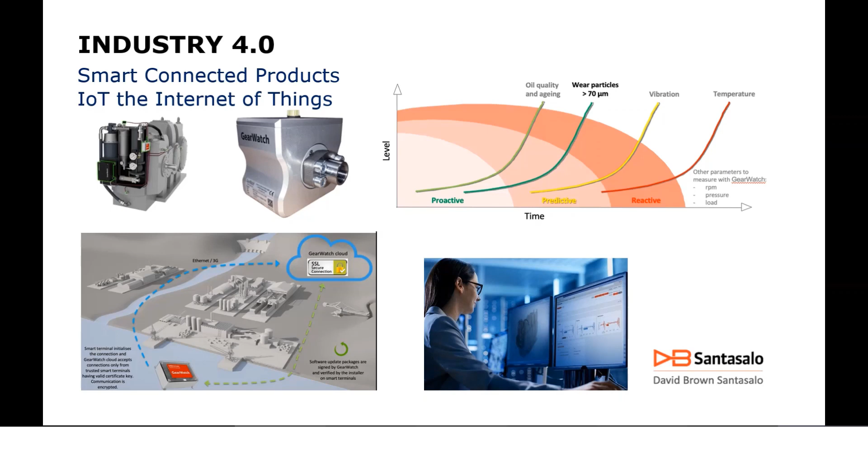That's been going on for a few years now, and it's incredibly useful. So you've got a big brother watching things to make sure things are going incredibly well. It helps you - you can get experts in to help you, and that's 24/7 monitoring of things to know whether things are going amiss or going well.

Then there's digital twins, and this is quite staggering. On the left, that's a picture from some of the gear rating software - the theoretical tooth flanks. So we said we're going to make this gear to say grade 4, 5 or 6, and that's what we're expecting.

On the left, the bottom two pictures are showing the measured tooth flanks. And then we go over to the right, for that theoretical tooth flanks, that's my stress distribution - the contact stresses, how they look. And then I can decide, is that going to last long enough or not?

But now with a digital twin, this is worked at the design unit at Newcastle University using software. We're measuring the tooth flanks and say, actually, that isn't what we expected. I'm going to take those actual measurements, re-look at the contact stress distribution and say, by the way, this is what your new stresses look like. Are you okay with that? Because you may have to reduce the life of the components, or you may say, feed it back to the system - actually, no, I'm not happy with that. And this will tell you exactly where to put things right and change it.

So we can do this, and now even as we speak, people are linking this to the machine, the grinding machine, taking these measurements, and this digital twin is saying, no, that's not good enough. No human interference - they're going to change it and say regrind it to get this. That's again another BGA member developing this for industry.

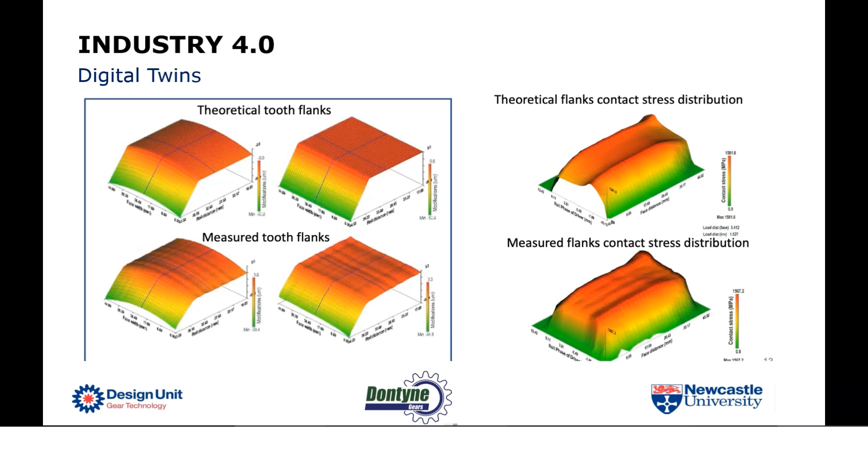Next thing, autonomous measurement. Hexagon, one of the leading people in gear measurement - we've got autonomous measurement. I often say that if you've got a very accurate measuring machine, you better make sure you've got a trained metrologist to drive it.

What Hexagon developed is robotic measurement. So if you're mass producing, this robot will take that component, put it on the measuring machine, do all the measurements. So 24/7, if you haven't got that shift system, you can have this robot - this autonomous system - you don't have to have your metrologist there 24/7. Yes, he can help program it and do those things. That's 24/7 asset management, making sure your key machines are running at the right speeds and feeds and everything like that. Those things are going on.

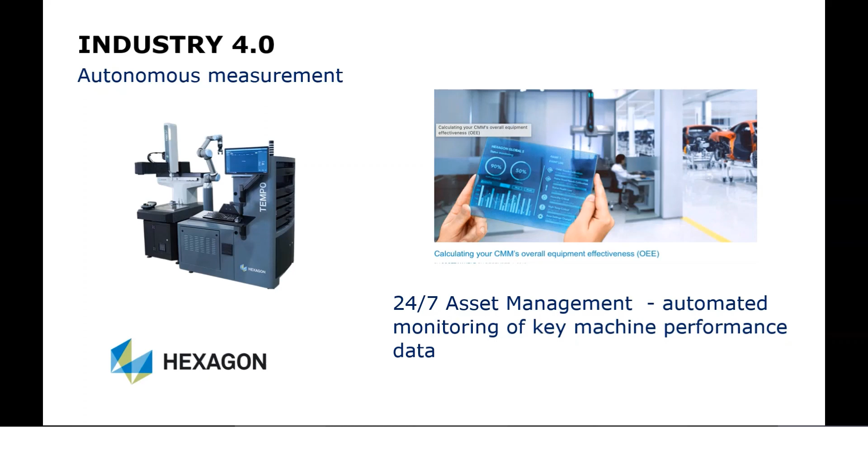And what we have at the BGA is Technical Awareness Day. So all these people we're talking about here with these technologies do make presentations so members can understand the latest developments. One final thing, which is perhaps the most scary here - this is transmission dynamics, have developed machine learning.

So what we've got here on rail tracks, in railway engines, we've got smart oil plugs put in there. Now, we talked about the GearWatch system where you're monitoring all the time and somebody's looking at it. This goes a step further - this is machine learning. Not only is that oil plug picking up the data, looking at it, but it's learning. It's taking that data and saying, oh, I've seen that before. The machine is like Big Brother doing all of these things.

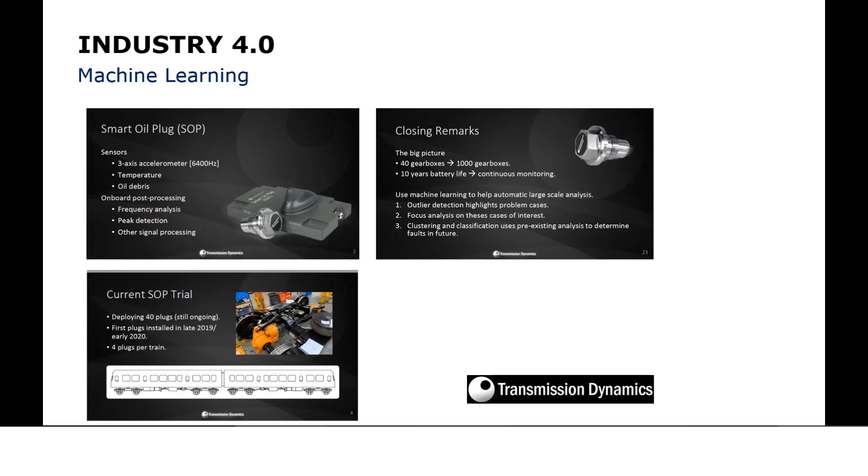And it looks like this. I don't know if you can see that diagram, but that smart oil plug has decided, I've seen that before, out of all these 40 different gearboxes - that means that gear's got insufficient gear tooth tip relief, it's got high vibrations, some ghost frequencies, all these things are going on.

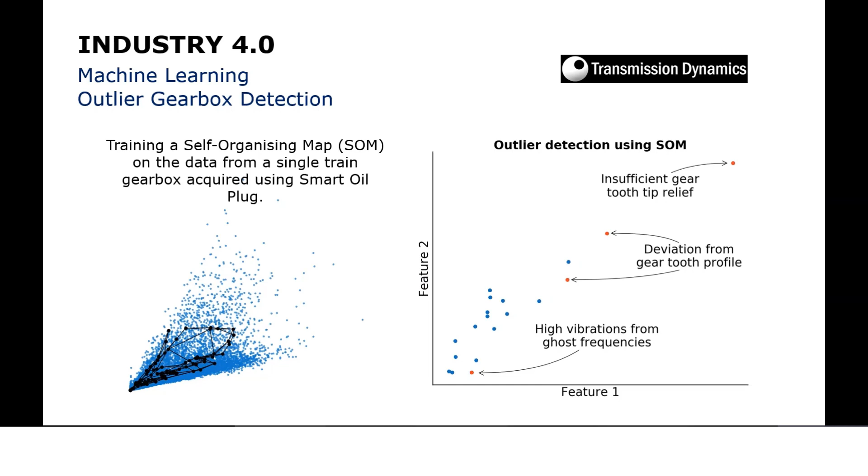But we've gone from south pointing chariots to Industry 4, about everything that's great. And the only message I've got across is yes, while we have machines, we're going to need mechanical power transmission and gears. We're always going to need gear engineers, and life is becoming more exciting. And if you think the challenges for the last 200 years are bad enough, we're going to cope with global warming and all the things we have to do to put this planet right. Engineers are going to have to get involved, and there's lots more wonderful challenges which we'll have to embrace and help.